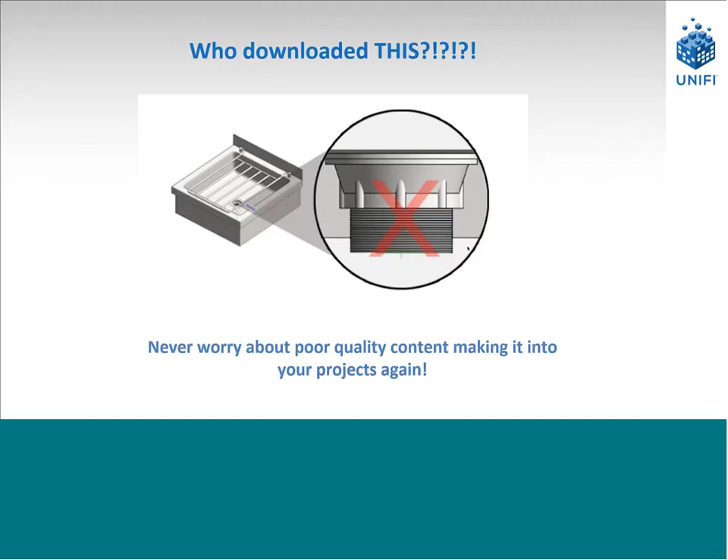Yeah, sure. The manufacturers want to do the right thing. They want to provide the design community with an actual 3D element of their product. They may not quite understand what is truly needed. The example you have on the screen - this happens daily.

With so much Revit content available online, without turning off the internet, it's almost impossible to prevent. And if I turned off the internet, I can't have UNIFI. That's true - it doesn't prevent anybody from going and getting it. Our opportunity here is working with our manufacturing community, identifying the different levels that are acceptable.

If there's good content from a vendor and the geometry can be middle of the road, but the data is rich, two things happen: we're going to continue using that data because we can trust it, and we're also going to notice that vendor's name and look into that product as a viable product to specify. So it's a win-win, a huge opportunity for a more consistent model. But at the end of the day, it has to bring value to the project. If you're not doing a project that needs that level of detail, we really have to question whether we're over-modeling, or do we need to scale it back.

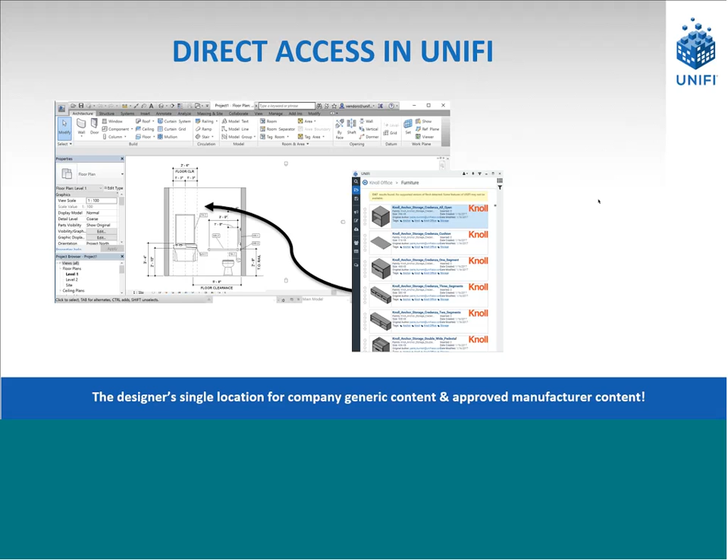And without further ado, I'm going to jump right into a web browser, and we're going to take a look at that and start to demo this live.

So all of the administrators today have access to the UNIFI Analytics and Management Portal, so you can go to app.unifilabs.com, and let me just go ahead and refresh this. In this application, you've got analytics, event streams, notifications, lots of great stuff in here, batch tag management tools. If you haven't checked this out yet and you are a company admin, I highly suggest you go check this out, there's lots of good tools and things you can do in here.

But you'll now notice there's currently live a subscriptions tab. In this subscription center, you're going to start to see brands being populated. We have lots of different manufacturing brands we're working to get onboarded into this system right now. While this is available live to all customers, the way to consume it in the desktop application, which I'll show you in a minute, is only available for early access customers today. If you want access to that, please email us after the webinar. But for those folks who do have it, we're getting feedback from them right now and getting this fully vetted before we launch live to everyone globally.

So you see there's a bunch of different companies in here and brands. You're also going to see the out-of-the-box libraries. One of the challenges with the OOTB libraries in general is you can only get them from the Autodesk Revit installer, which most folks go and get that stuff and put it on the company network shared access drives.

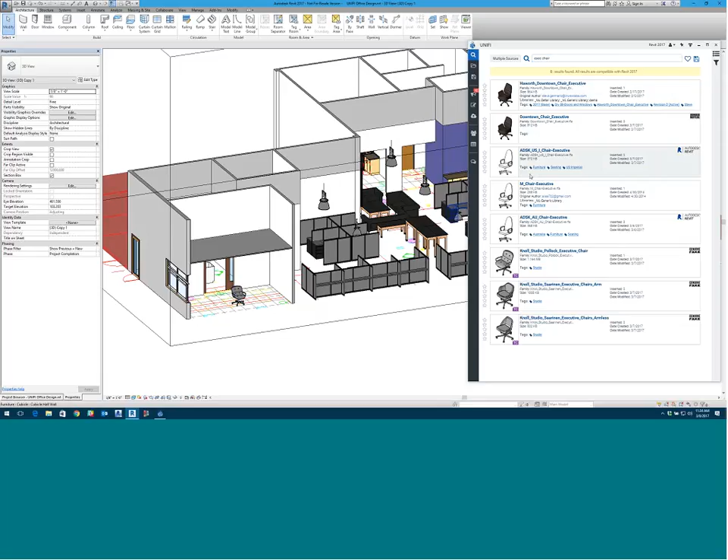Because it's been company approved, you'll have rights to be able to use it, and it's already approved in your ecosystem. Just like anything in UNIFI, you click to download and insert directly into your model. So the same type of functionality you're used to from searching and browsing your existing content is available here, just with multiple sources.

And you'll see the logos will show up in different view modes for the different sources as well, so you can quickly identify where the source is coming from.

Under the Browse section, you're going to notice a slight tweak here. We've separated out libraries from channels. So on the Libraries tab, you'll see all your company and shared libraries like normal. Then when you flip to Channels, you'll see all the channels here. We're just separating this out, making it a little bit easier to navigate between the two, and we have some more things we'll be doing in the future here.

You go ahead and click on a particular company. You'll see the family category breakdown like normal. And then jump in there, and you'll see all the content available by that particular manufacturer.

If we dive into a piece of content, the product pages are also modified a little bit from what you're used to seeing. You'll still see the high-level information up top, the ability to insert from the image. You will also have the ability to 5-star rate and rank this content, and this is important. The manufacturers really want to have this communication back to them.

In an effort to make content in general across the globe a higher level of quality, we have to communicate back to them. So let's make sure we do that and give them feedback if it's good or if it's bad, right? It's important.

You have a link here. You'll see their logo. That link will get you back to their manufacturer website, and it'll punch up your web browser. You can also email the manufacturer.

So you have a question about a particular file. When you click the email, it's going to put the name of the file in the header of the email, so they'll know exactly what you're referencing. And this email may be routed to their particular teams internally that can speak effectively about the content, so you can get a hold of somebody there that can actually help you for different challenges that you may have, or if you have new product requests, you can email them as well there.

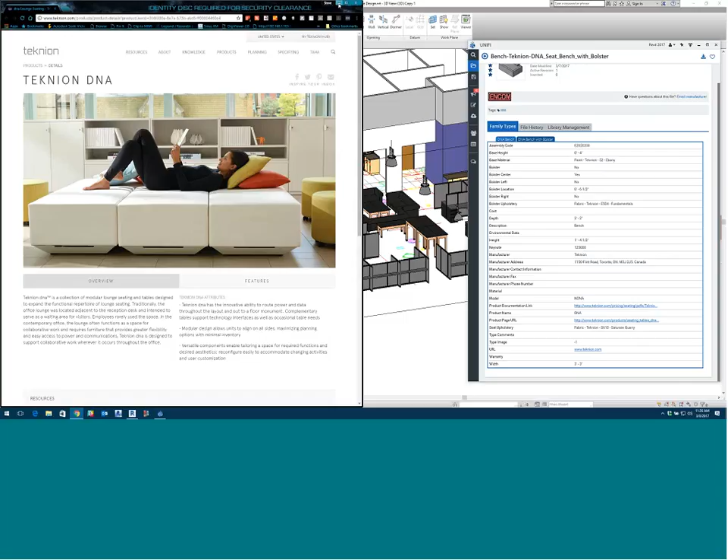Just like normal, any of the content that gets uploaded to UNIFI's cloud is parsed out here. So we'll see this is a piece of furniture by a furniture manufacturer. We've got product pages, URLs. You punch those up, go right to the product page of that particular product. So this is just showing the parameters and their values from this particular product itself.

In addition to that, because this content's in channels, you can again use those in saved searches. So if you want to have a saved search that says, hey, show me all chairs from across these 5 manufacturers, right? You can set up pretty advanced saved searches like that really quickly, really easily, and just have that stuff available for your designers.

So it opens up a lot of opportunities and a lot of workflows which previously haven't been available in the industry. So we're pretty excited about that.

But everything flows through you as the BIM manager or your BIM management team. They're going to be the gatekeepers here. We're going to work on some ways for the next version for if you're just a normal user and you're searching here to show you some brands that you may not have access to just yet and then allow you to request access to them. But for right now, we want to make sure that the ecosystem gets populated, controlled, and only that good content is coming into your ecosystem.

So let's take a look at another example. If I jump into, let's go to my Australian out-of-the-box library. Another thing about channels that's going to be interesting is we're starting to see manufacturers making regional specific content libraries. So they may have different products they sell in the U.S. as compared to Europe, as compared to Australia, and these channels can be regionalized.

So they may have 3 different channels for 3 different regions, and the content and the data in the content may be completely different for the products they manufacture. So we want to give you guys the ability to say, okay, well, this out-of-the-box library by Australia, I'm going to subscribe my Australian user group to have access to it. None of my other user groups need to see this. So we can reduce the overall clutter. It's not a singular dumping ground, right, where you just go and search and you see products from all across the globe for all different languages, for all different regions that may never be applicable to you.

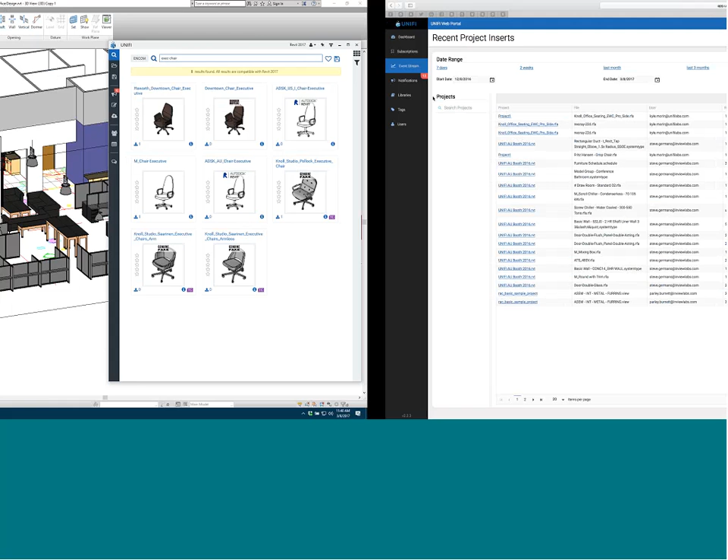So a couple different differences on how UNIFI Connect is different. We really want to make sure its firm-wide approval process is in place. You guys have control over this. You can whitelist your manufacturers, hopefully creating that path of least resistance so your designers gravitate towards using both generic and manufacturing content in one place where it's tracked, mitigated, and controlled from your perspective as a firm. Quick searching and insertion, like you saw.

One thing that's also interesting is we're exploring new ways to work with different types of content. Manufacturers today typically just distribute RFAs and loadable families. UNIFI is compatible with system families, drafting views, and schedules. So we want to explore if we can get all those different content types and element types into the system. If I don't want to go in and swap all my shared parameters to make a manufacturer's piece of content match my schedules, well, if the manufacturer has a schedule, maybe I can just bring that in and use it and tweak their schedule.

There's lots of different opportunities there. There's lots of system families which previously may have been challenging for manufacturers to create, like roofing systems or wall systems. They can now create those and distribute them through UNIFI as well. So it's opening up some different doors, and it's pretty exciting in that regard.

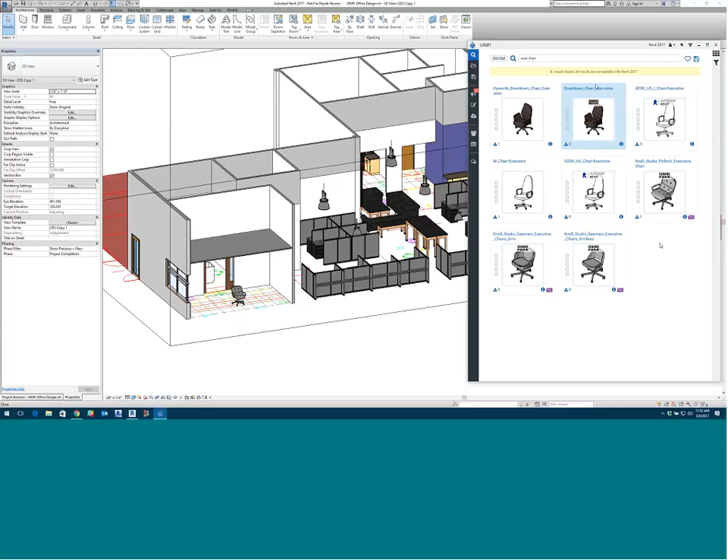When we are doing a VDC project, the biggest difference we identify between a VDC project and our standard design BIM projects is the integration of construction methodologies. So if it's a VDC project and we have fabrication scope, we are using vendor and manufacturing content, and it does increase when we take on more of that responsibility. If we are delivering an EPC project, engineering, procurement, and construction, we are responsible for the engineering, procurement, and construction, so if we're buying the product, we want to specify the vendor and have accurate content. That has elevated the opportunity for that usage.

But we have to balance that, because the other half of my company is just an AE service side. Being able to balance when it's appropriate is not necessarily easy, because if you have access to a really good door family, but it's too much for what you need, it's about educating your design staff on what is appropriate for the project, and building those champions within those disciplines, understanding the nuances of putting in too much detail versus not, versus what you actually need.

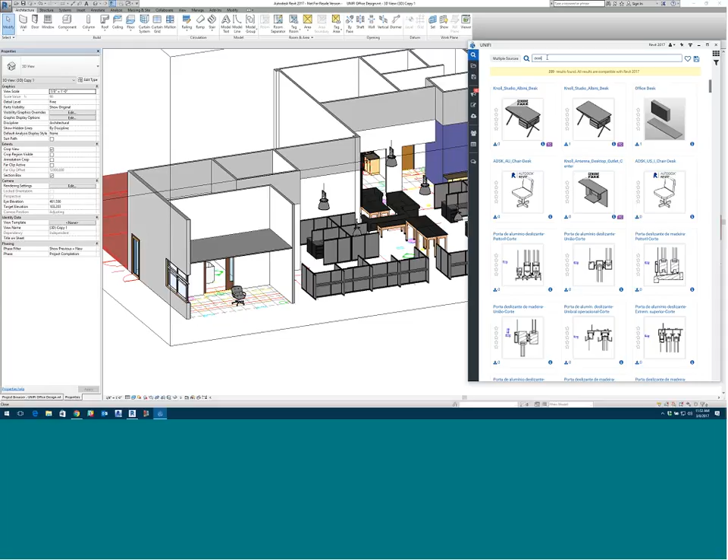So as a VDC manager, we have to run maintenance on the models, communicate with our disciplines, and set goals and boundaries to where we need to take that. But as we integrate more with construction, you're going to see a need for more of that fabrication level.

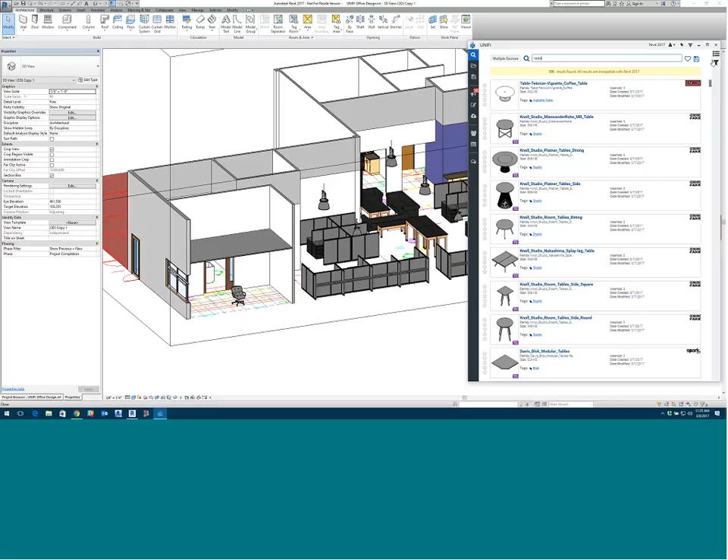I've got another one here from Tony. The localizing or branching of content is a great feature. Is it possible to run an events report listing all localized objects on a subset of projects? If so, is it easy to get from this report to visualizing objects in Revit in a project context?

If I understand your question correctly, inside this event stream you can actually filter by project. Once you filter by project, there's an export to Excel button on the right-hand side. So it's possible to look at an entire subset of content that has ever been loaded from UNIFI into a project and see whether that content is in sync or out of date with what's currently in the cloud, and run a project report. It'll go to Excel today, and that project report can be sent to different folks within your firm to mitigate or update that content. I believe that answered your question, but we can get into that offline in more detail.

One last question we'll take. Do you have commercial kitchen appliances also? How broad is your content? This one's from Dale.

Great question. We've worked with several hundred manufacturers across all different verticals, and we're not targeting any one particular vertical. So you're going to have everything from architectural to kitchen equipment to electrical types of products. What we're doing is working with folks like yourselves to let us know what particular brands you want to see in here, and then let your manufacturers know you want to see their content in the system, and that's going to help us get there quicker. We're talking with folks all across the board, but in the kitchen appliance and food service equipment space in particular, there are a lot of manufacturers we're talking to right now. So hopefully soon. This is just getting up and running, and we're in the process of onboarding many manufacturers as we speak, so this will continually become more populated as time goes on.